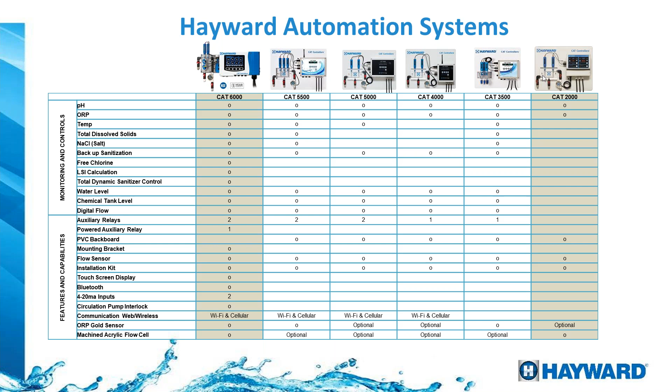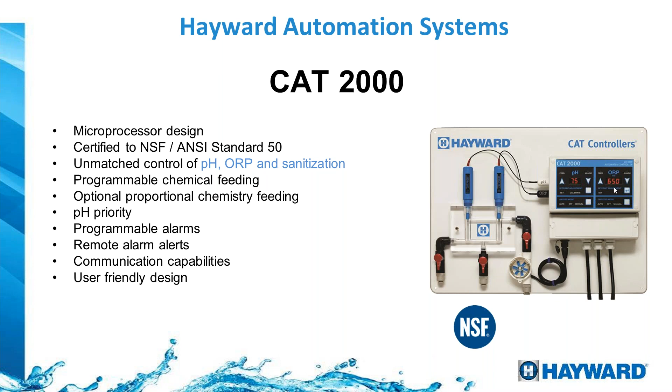So in the CAT 2000, we have the flow cell, and in the flow cell we have the two sensors, the pH and the ORP, and we are going to be setting our reading directly into this controller.

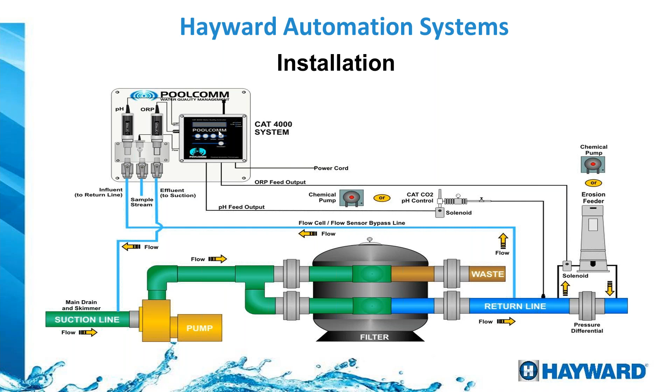And then whenever the tech has to do any type of service, or whenever the tech goes in and has to measure the water parameters, they can just take a water sample directly from this valve here in the center. They just open the valve when the system is running, and take a water sample directly from here. That way they can ensure that the water sample they are taking is directly from the sensors - it's the same water that is coming into our sensors. That way they can compare it to the readings in the automation, and they can adjust it, they can calibrate it if they need it.

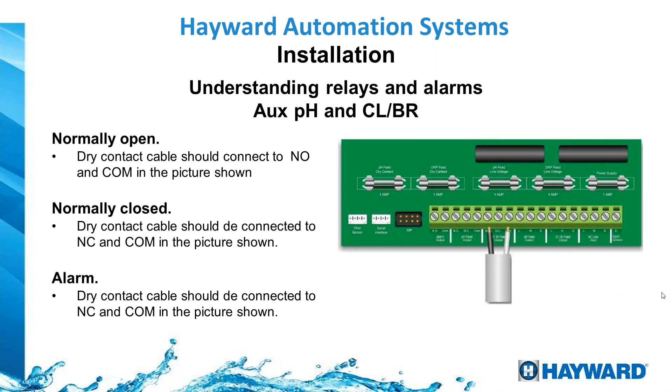On our boards, on our systems, we can use different types of relays. If we are going to use a salt chlorine generator, we are going to use a dry contact, and that can be wired directly into our boards. Here is how the CAT 2000 looks.

We can increase our pH levels. We are going to have alarms as well. It is going to give us an indication whenever it is actually feeding acid or base into our pool in order to adjust the pH, and the same with the ORP side. If the feed on the ORP is feeding and for whatever reason it is not adjusting the ORP, noting no change, then it is going to give you an alarm.

For example, if we are using a tank with chlorine in order to adjust our ORP, and it has been feeding for an hour and it doesn't see a change on the ORP, then it is going to give you an alarm. In that case, it can be, for example, that the tank is empty, so we have run out of chlorine.

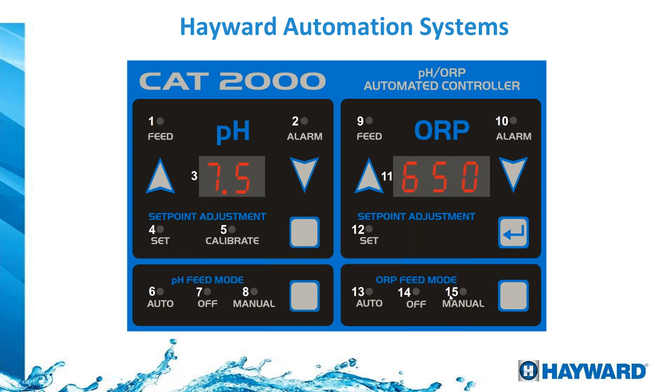The pH feed, obviously we want to keep it automatic, but if for whatever reason the sensor has been broken and we want to be able to keep the pool running, then we can also set the pH feed into manual. And the same with the ORP. We are only going to do that if for whatever reason the sensors have been damaged, and while we wait for a new sensor to come in, we can set it for a manual feed.

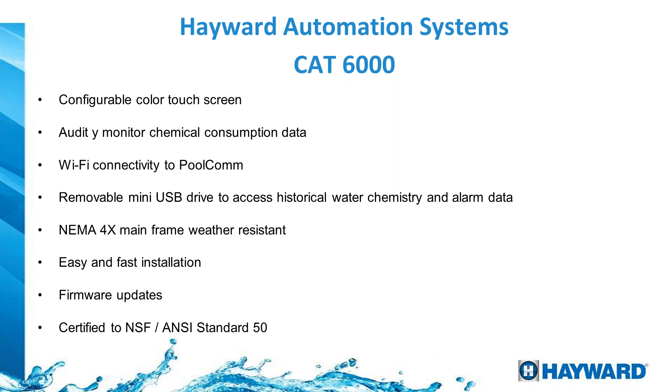Now our newest unit, which is the CAT 6000. The CAT 6000 has all of the features that we saw before, but it also has some other benefits. For example, it installs directly into Wi-Fi, so now the customers can see and control the unit remotely. It also has built-in software updates, whereas the other unit doesn't have that ability.

The reading that it is going to give us includes pH, ORP, and also a free chlorine reading in parts per million. This is a benefit in case our customers are not familiar with reading ORP and actually prefer to see a free chlorine reading. So with this CAT 6000, we can get both the ORP and the free chlorine reading. It is also going to give us a TDS reading and temperature.

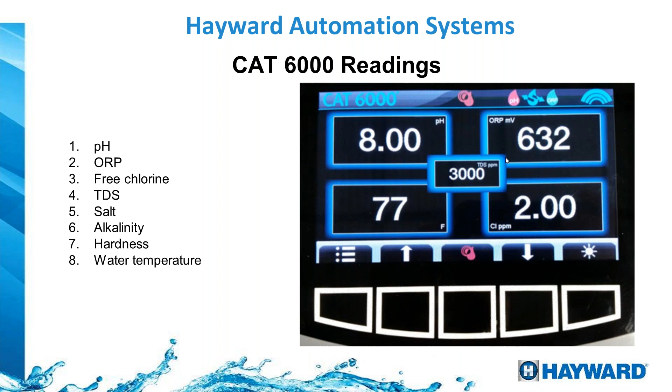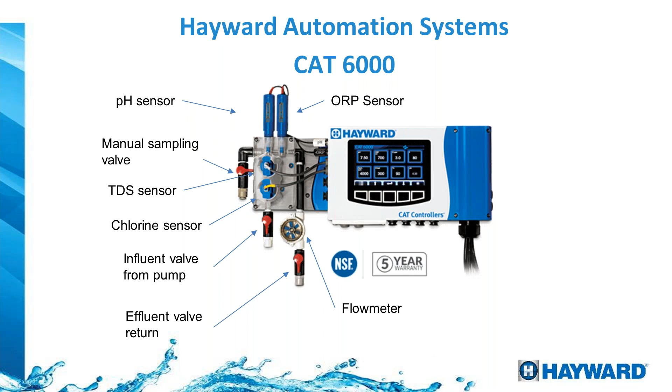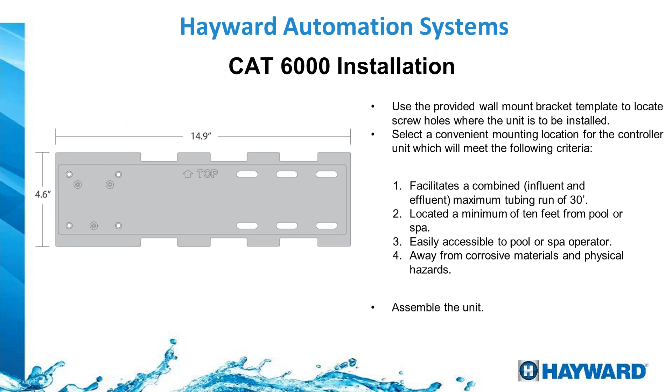Also on the flow cell, we have a flow switch, because we don't want the system feeding without any flow. Installation is very simple because this board just attaches directly into our equipment room. It comes with a guide where we attach the plate and then just mount the system into that plate.

Here we see a look more closely into the sensors, how they look. They all come pre-wired into the system, but everything is very easy to wire as well because it has all of the connections labeled for all of these sensors.

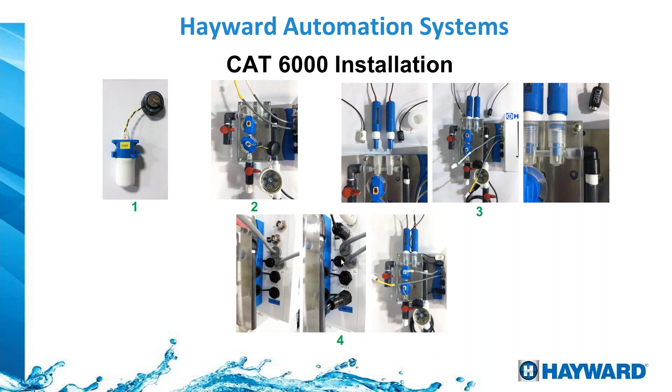Here we'll see an example of using any of these controllers with salt chlorinators. Remember, we take our sample after the filter and return before the pump. In this case, we're using a tank to inject muriatic acid or sulfuric acid into the pool to keep the pH level balanced.

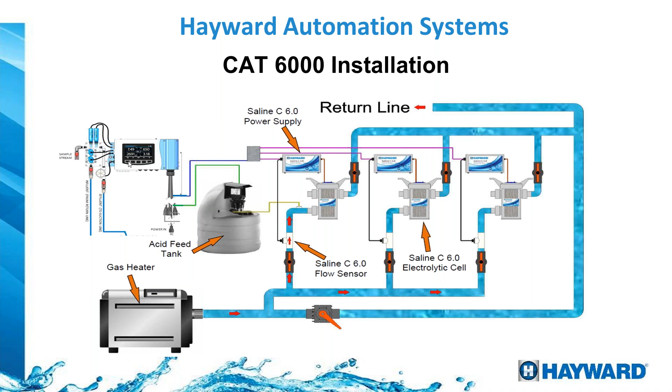Instead of a valve or chlorine feeder, we're using salt chlorine generators. Coming out of one outlet, we can actually power multiple cells in case we have a very large pool and need more than one system. The unit doesn't have to work with just one. If we have more than one salt chlorine generator, we can also control it through any of these systems.

This system is also going to give us alarms and a status indicator. Whenever it's feeding acid or feeding for the ORP, it's going to give us an alert on that. And here we can see the Wi-Fi icon, because this unit has Wi-Fi built in.

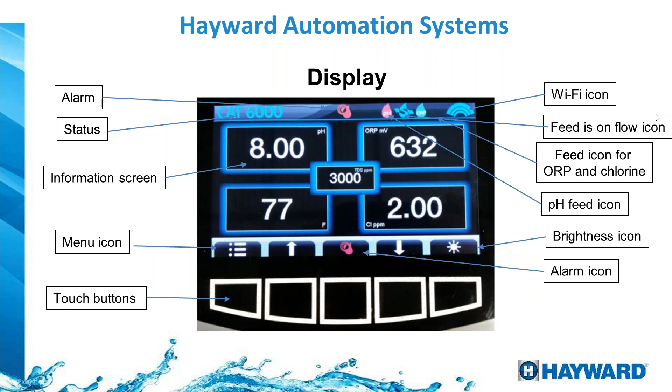So it's connected — we can just connect it to the Wi-Fi on the job site. Then, by logging in through an app that I'll show you a little bit later, we'll be able to see all of the readings for the chlorinator.

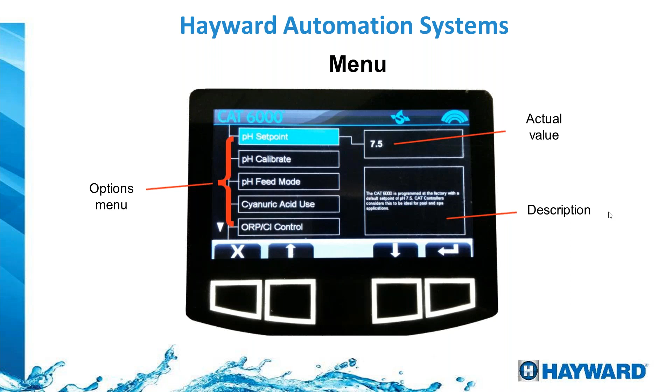Here we can set our pH, calibrate our pH, tell it whether or not we're using stabilizer or cyanuric acid, and see our ORP or free chlorine readings. If for whatever reason we get an alarm, for example, it'll show us the pH is higher than recommended, and it's going to give us an alarm.

It shows the pH in red, and at the same time gives us an alarm button. Once we go into that, it'll tell us the reason why that alarm is there. In this case, for example, it may have been trying to feed acid to adjust the pH, and after doing that for a long time without seeing a change in pH, it gives an alarm.

And since it's connected to Wi-Fi, that alarm can also be sent through text message or email. That's a benefit as well, because now the tech or service guys can react much faster and see why we're getting that alarm.

Probably either the pH feed pump is broken, the tank is empty, or a hose might be broken. This way, we don't have to wait until the next service — by getting that alarm, we can react much faster.

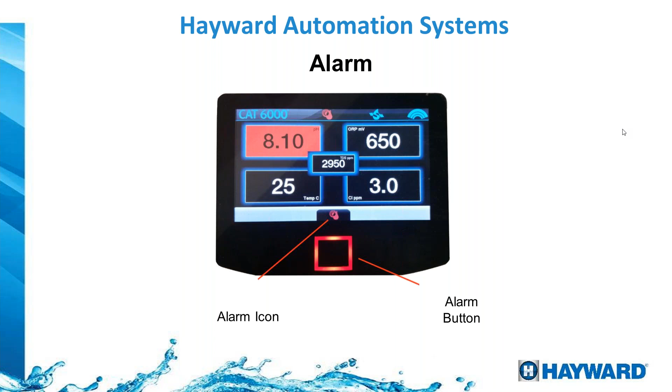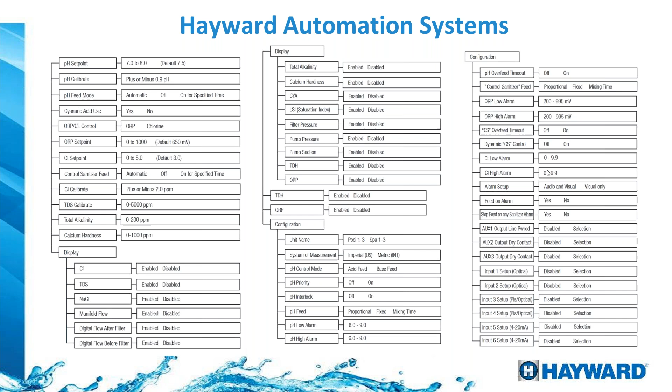We can see our TDS levels, and we can do alkalinity and calcium as well. All of these are things we can just program on the unit, and that's going to help us get an accurate reading on our ORP as well. And remember, all of the configuration for the alarms is there too.

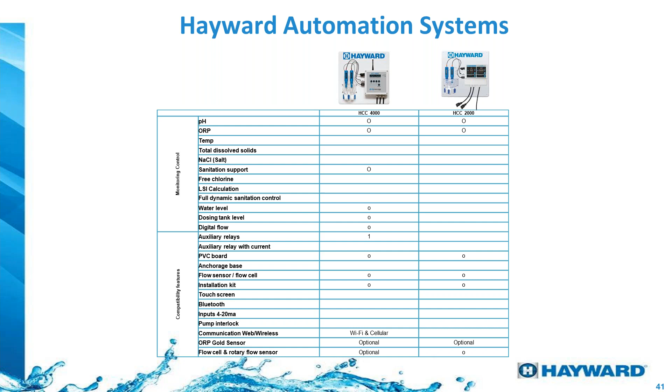Now another unit — we have two different types of units when it comes to automation for commercial pools. We have the CAT, and then we have the HCC. The HCC is a Hayward branded unit. It's more basic than the CAT 6000 we just saw, but the HCC 2000 is a great unit for entry-level pools, or a customer that doesn't want to spend a lot of money but still wants the benefits of automation.

We can easily do it with the HCC 2000. This one has all of the benefits of the CAT 6000 that we saw previously, but it doesn't have Wi-Fi connectivity.

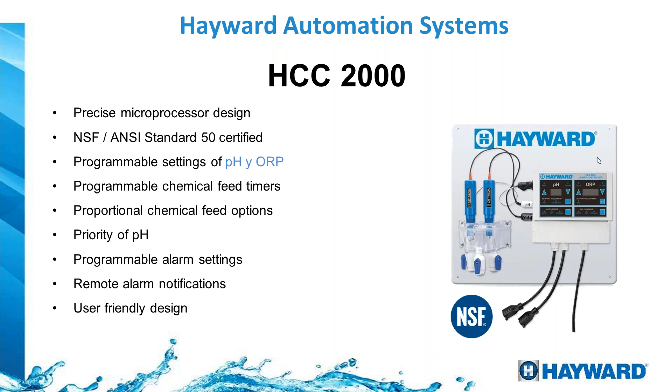If the customer wants to be able to access it remotely, or for example, they are on a resort complex and have multiple pools, and they want to see all of those pools and manage them from a central office, then I recommend you go with the HCC 4000.

This HCC 4000 has Wi-Fi connectivity, so it gives us all of the benefits, and it keeps internal readings for up to 10 days. So it not only gives you the readings right now, but you can go back up to 10 days and see how the water has been keeping up.

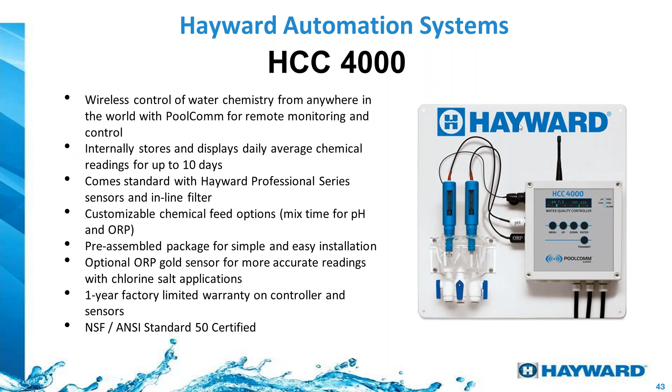All of those units with connectivity connect through the PoolComm. Once we log into that PoolComm, we can have multiple units into one account. It's perfect for service techs, or for resorts that have multiple pools on their location — a kids pool, an adults pool, a spa as well — and all of them can be controlled through a central location, getting alarms for each individually, so they can react to the pool before it becomes a problem.

We can also see the pH readings, with date and time — in this case a pH reading is taken every hour. We can also see it on the graph like we saw previously, and it gives us an indication if our pH or ORP has been out of range.

We can also get all of these alarms via email, so keep that in mind, because that is a great benefit. For example, in this case we had a high pH of 8.3, and we got an alarm via email.

So that's great, because now we don't have to wait for a tech to visit before these problems are noticed. Some of the benefits of having a connected system: first, we have data storage, we have the graph, and no phone line is required because these units connect via Wi-Fi. But the biggest benefit, I think, is having a central location where you can manage multiple pools. If you're a service tech with multiple pools under your command, you can offer them one of these systems and be proactive when dealing with your customers instead of having to be reactive.

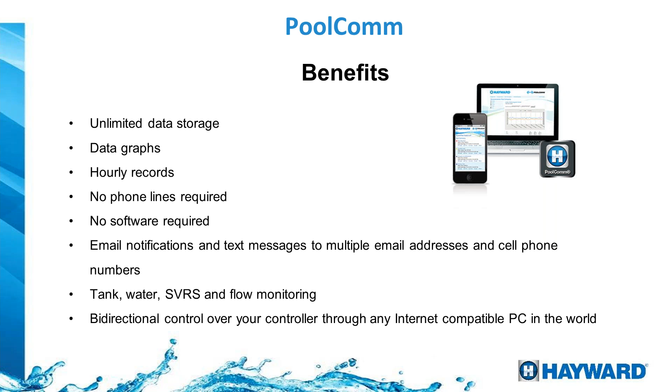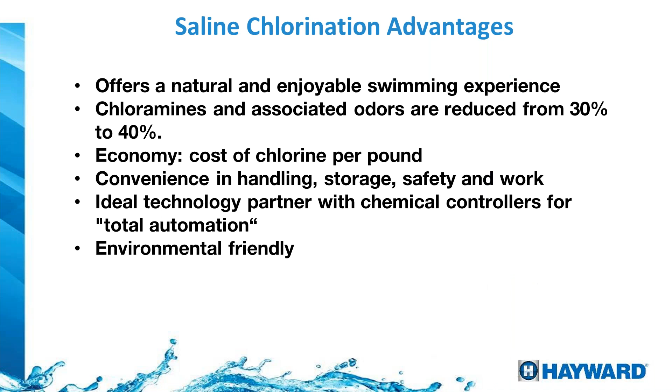Now we're going to take a quick look at our salt chlorine generators. We're going to look at our Saline series. We have two different sizes: the Saline C 6.0, which produces 6 pounds of chlorine per day.

This is a great benefit because once we tie a commercial automation, like the ones we just saw, with one of these saline controllers, the saline is only going to produce chlorine when the system needs it, when the pool demands chlorine. This unit comes with just a single cell, and you'll be producing 6 pounds per day instead of having to run multiple residential cells, which makes it more complicated for the customer because they have to manage multiple systems.

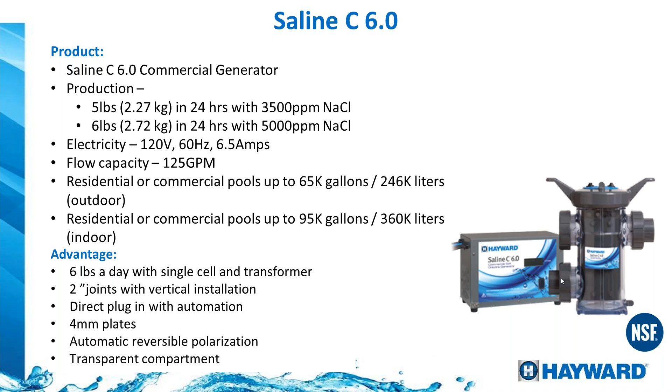In this case, just one unit does the job of what you'd otherwise need 4 residential units for. It takes less space, and the cell sits in a clear vessel, so we can see whenever it's time to service it. We can just open it up, take the cell out, and do whatever cleaning is needed without opening it unnecessarily.

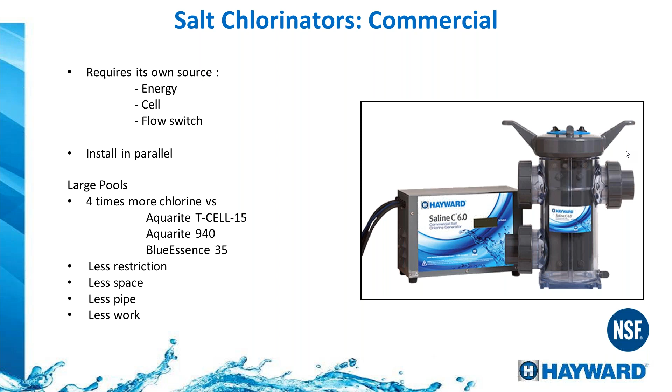And then we also have the Saline 11. It has the same benefits that we just saw with the Saline 6.0, but this one gives us 11 pounds of chlorine per day.

Keep that in mind, because obviously if we have larger commercial pools over 100,000 gallons, then we can offer one of these systems.

The great benefit that this one has is that the cell actually comes with 4-inch unions, so that is going to be a lot easier to install. It is going to create less restriction on our swimming pool. It also has a transparent housing for the cell.

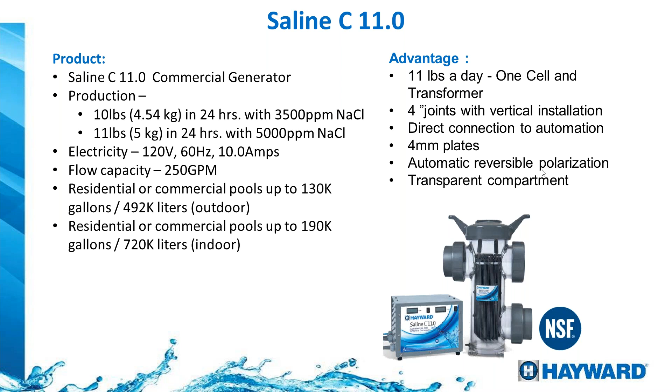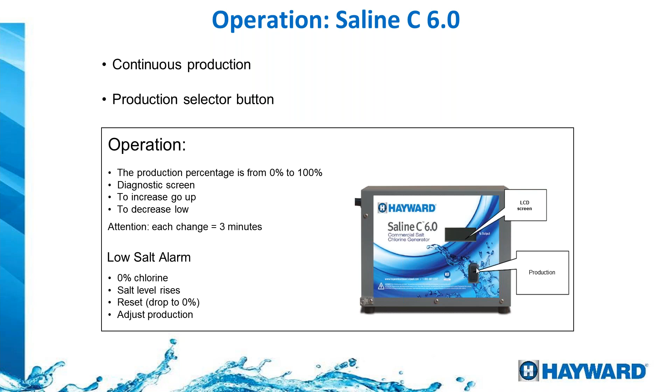And since it has 4-inch unions, now we can work with flow capacities of 250 gallons per minute. We can see that it has an LCD screen, and we can adjust the production in case we don't have a controller. If we have a controller, we just let the controller adjust the production whenever it needs, because the controller in that case is going to be turning the unit on and off whenever it requires chlorination.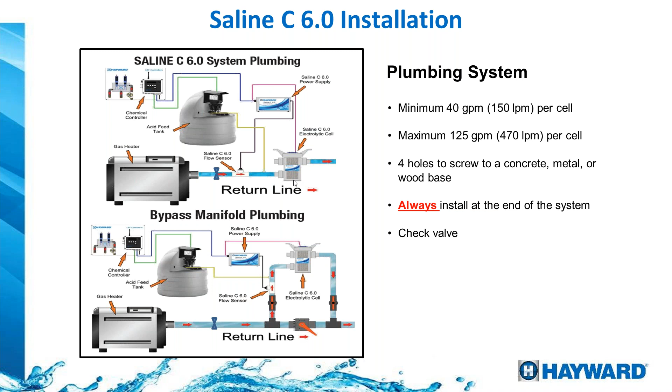Here we can see more examples. In this case, we have a flow sensor that has to be installed in order for the salt cell to work. Here we can see the plumbing: we have the controller, the green line which controls our acid pump, and the blue line which controls our chlorinator. Whenever the unit needs chlorination, it's going to turn it on and off. If not, it is going to be much better managed, because through the ORP we're going to be managing when the chlorinator actually works.

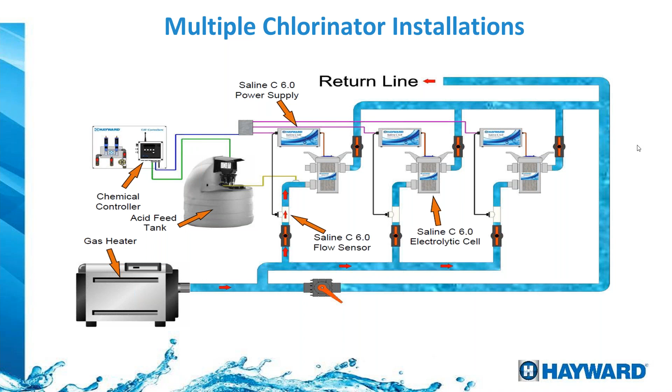Here we can see the example again of multiple units. If we have a pool that requires more than one salt chlorinator, we can do it. Keep in mind that we're always going to do that in parallel - we are going to be feeding all of the cells at the same time, and coming out of these cells at the same time. We don't want to go from one cell to the other, because doing it that way is not going to increase our chlorine production.

Keep in mind that for these units to work, we require a minimum of 40 gallons per minute. At that 40 gallons per minute, we're going to be producing about 5 pounds of chlorine per day. If our salinity is higher, then we are going to be producing 6 pounds of chlorine per day. So keep in mind that if we're installing it on a bypass and the bypass is too open, not enough flow is going through the cells, and that is going to affect our chlorine production.

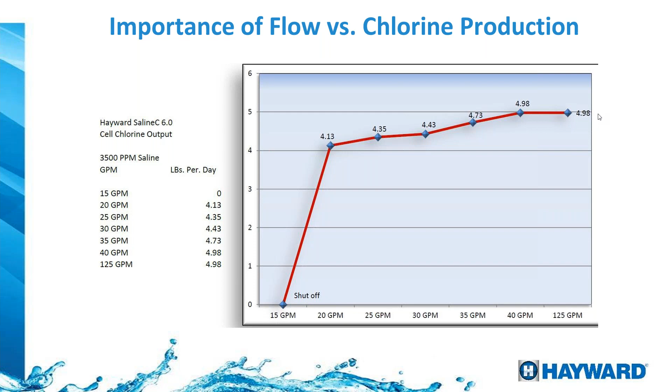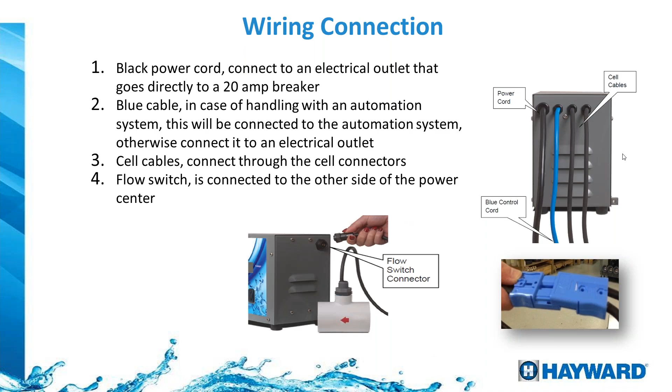We can also complement our sanitization with a UV system. Remember, the benefit of UV is that it kills bacteria that many times chlorine doesn't kill, unless the chlorine reading is extremely high. We have our UV system, which is available up to 3 lamps, and with 3 lamps the maximum flow is about 120 gallons per minute.

Remember that this unit is designed so it can also be installed outside. It is totally corrosion resistant. The benefit of having UV is that it's going to kill Cryptosporidium, Giardia, and other bacteria that 3 parts per million of free chlorine is not going to kill by itself. So keep that in mind, because if we have a spa with low volume of water and high usage, the amount of sanitization we need is going to be higher. A UV system can be installed in conjunction with a salt chlorinator.

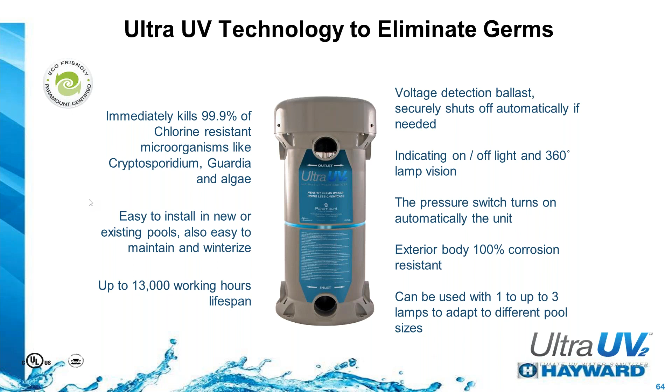Then that is also going to help reduce our chemical use, but at the same time, it is going to kill all of that bacteria that the chlorine doesn't kill at just 3 parts per million. And remember that we do not recommend, and you cannot use UV as a primary sanitization method. It is always as a secondary. It is a support to a chlorinator, for example, because it doesn't leave any residual in the water.

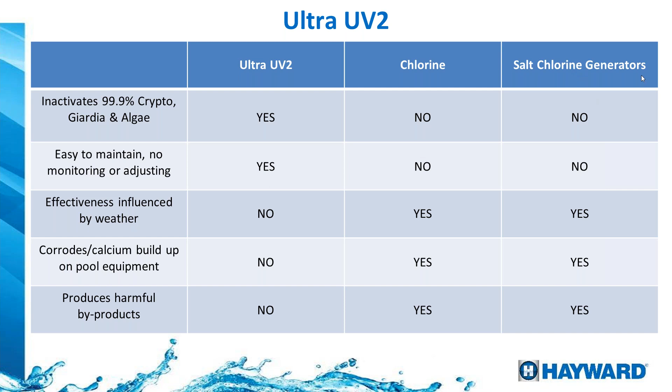So you're always going to need some sort of residual of chlorine in order to have that water protected when there's no flow. So again, it inactivates 99.9% of all of that crypto, Giardia. It is easier to maintain. And then its effectiveness is not influenced by weather, so that is a good thing, but obviously it is not going to leave that residual, and that's why we need the salt chlorine generator or some sort of chlorine in order to keep in the pool.

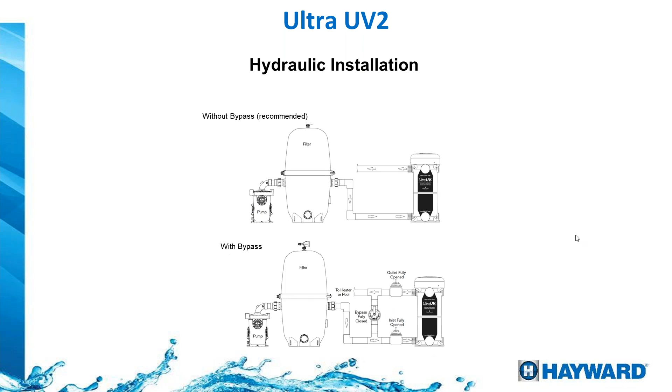And here we can see an example when installing one of our UV systems. It can be plumbed directly, or if you have a higher flow above 120 gallons per minute, then you can do a bypass. And remember that we have multiple inlets and outlets on this unit. So when we are going to be installing it, for example, at 120 gallons per minute, we can see here on the bottom that we have 4 connection ports all around the housing. So keep in mind, for example, we have a connection port here on the left, we have one here in the front, we have another one here on the right, and then we have one that is on the back side.

For us to work with flows of 120 gallons per minute, and we have 2.5-inch or 3-inch plumbing, we cannot just plumb it into one port. In that case, we are going to do a manifold, and we are just going to tee and come into one side, and then also come into another port. And that is going to ensure that we can work with higher flows, because remember, the connections are 2-inch, but we are able to sanitize up to 120 gallons per minute.

So on the inlet, we are going to be coming through 2 ports at the same time, and the same on the outlet. On the top as well, we have a port here, port on the right, port on the left, and a port on the back side. So whenever we're working with over 90 gallons per minute, then we recommend using 2 ports in order to get a better flow.

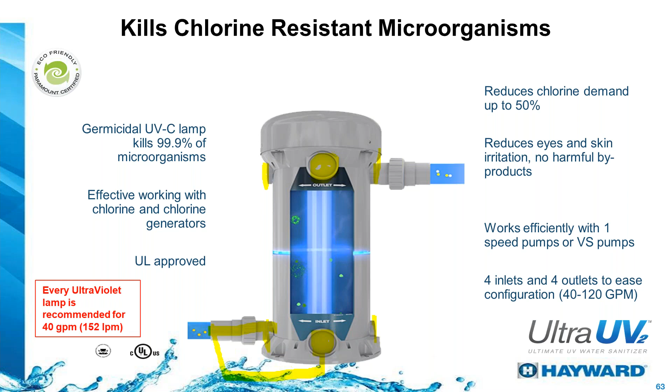And that has been an overview of our commercial automation and sanitization. Remember the controllers that we discussed, the CAT 2000 and the CAT 5000 with Wi-Fi connectivity. Then we also have the line of HCC 2000 and the HCC 3000 also with Wi-Fi connectivity.

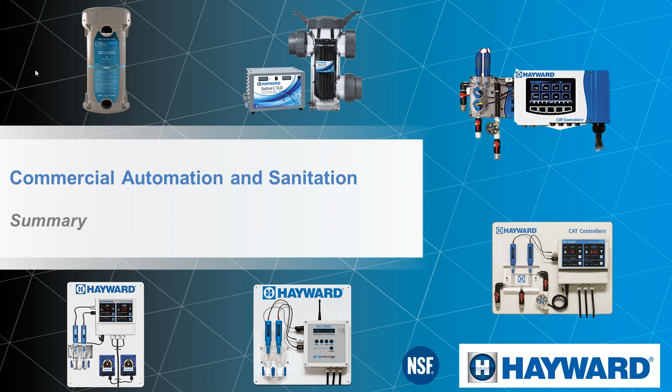Remember that all of these units can work with dosing pumps, as we can see here on the left. So in this case, we can have a dosing pump for chlorine, another dosing pump for acid, or we can have just one dosing pump for acid, and the chlorine we can do with one of our salt chlorine generators. Also keep in mind the UV is a great disinfectant, a great sanitizer as a backup sanitizer for our commercial projects.